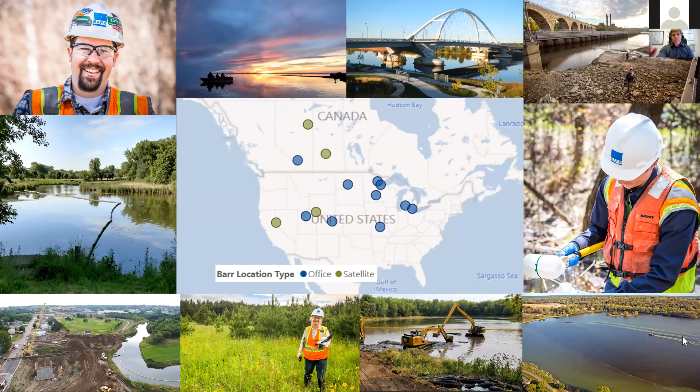Welcome to the Minnesota Association of Watershed Districts annual conference, and thanks for joining us at our session. Although we are really looking forward to gathering in person, hopefully next year, we are glad we can at least gather virtually this year. In the next few minutes, we'll give a brief overview of Barr, introduce our upcoming presentations in this session and also later at this conference, and highlight a few of our newer senior staff.

Of the more than 425 employees in our Minneapolis office, nearly 100 are engaged in water resource engineering and planning, stormwater, floodplain and wetland management, limnology, and landscape ecology. Our breadth and depth of experience offers watershed organizations peace of mind that we can provide an innovative solution to any water resource related challenge that we encounter.

Barr has served as the primary consultant of 18 different watershed organizations in Minnesota, with some of these relationships dating back to the 1960s. And we have worked with numerous other watershed organizations across the state, region, and country. And we are excited to share some of these experiences with you today with our upcoming talks during this session.

In one session, Senior Water Resource Engineer Greg Wilson will present pond treatment with spent lime to control phosphorus release from sediments. This presentation focuses on research done in cooperation with the Ramsey Washington Metro Watershed District, Vadnais Lakes Area Watershed Management Organization, and the City of White Bear Lake, and includes the evaluation of the costs for aerial chemical applications.

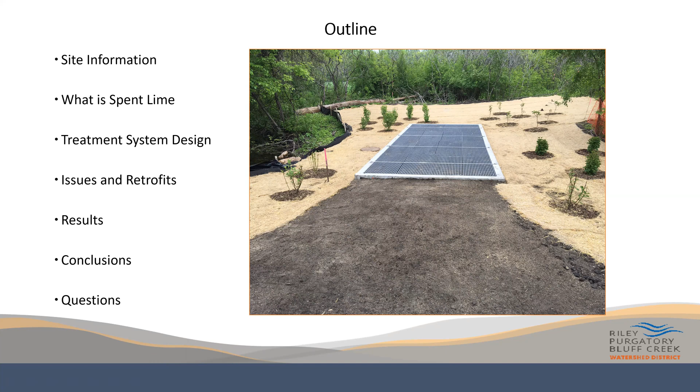But just a general outline for today: I'm going to discuss the site information, why we needed the spent lime treatment system there, what is spent lime and how it works a little bit, look at the treatment system design, how it functions, and then some of the issues and retrofits we put in place to correct those issues, and then work over a couple of years of results, sum it up with some conclusions, and then we'll have plenty of time for questions.

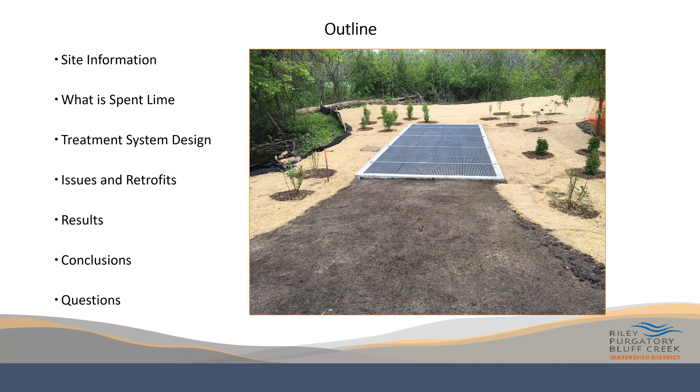So for those of you that are not familiar, the Riley Purgatory Bluff Creek Watershed District is about 50 square miles, and it's located in the Southwest Metro. Primarily Chanhassen, Eden Prairie, and Minnetonka cities make up the Watershed District. However, it does include 7 other cities. And the particular lake of concern that I'll be talking about today, and where the project is located, is Lake Susan, which is within the Riley chain of lakes.

Just a little background information on Lake Susan. It's a relatively small lake. It's only 88 acres. It has a max depth of 17 feet, and the direct runoff of the surrounding area is 66 acres with an upstream watershed size of about 1,200 acres. It's considered a eutrophic lake, and it is impaired for nutrients and mercury, which we have seen continuously. It's one of the more degraded lakes within the Riley Purgatory Bluff Creek Watershed District.

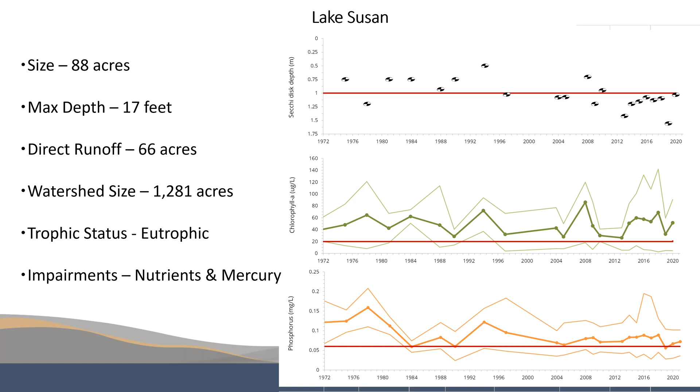So now I'm going to talk a little bit about the issue wetland that we were concerned with. So in 1996, Wenck completed a use attainability analysis, which really dives into looking at the areas of concern around the lake and identifying project areas. And this was updated by Barr in 2013.

And it identified that 67 pounds of phosphorus per year were entering Lake Susan from the wetland complex to the southwest. And this was the largest identified external source. And we looked at quite a few different options.

A wood chip bioreactor and iron sand filter were considered for this project location, but mainly because of the contact times with those two other treatment facilities, the overall footprint of the project was too large for the constraints at the project site. So we needed to fit a smaller treatment facility in there because of the wetland, and there's a trail system that runs in there.

And the spent lime treatment system, while very comparable in removal rates, allowed a smaller footprint, which is ultimately why the board decided to go with the spent lime treatment system. And again, we did partner with the City of Chanhassen. I'd just like to thank them again.

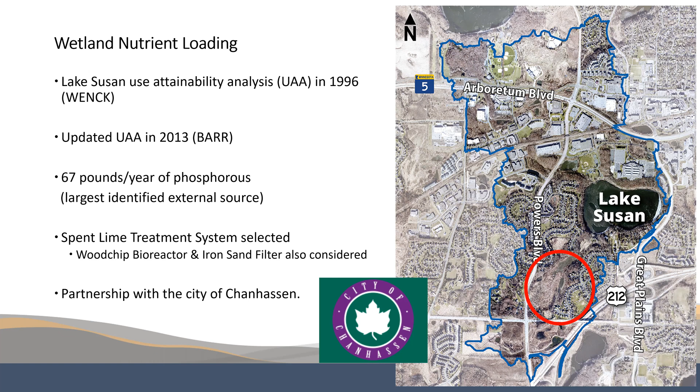So a little bit about what spent lime is. Basically, spent lime is calcium carbonate. It's a byproduct of drinking water treatment plants. Water is filtered through, and as water flows through spent lime, phosphorus binds to the calcium and forms calcium phosphate, and then it just leaves the phosphorus behind.

And although we don't really have a handle on exactly the lifespan of spent lime, its binding efficiency for phosphorus is really high. And some other projects have indicated it's got a very long lifespan. And then I just wanted to show the pictures of how we get the spent lime. It can be in larger clumps also, but the pictures to the right are compared to sand.

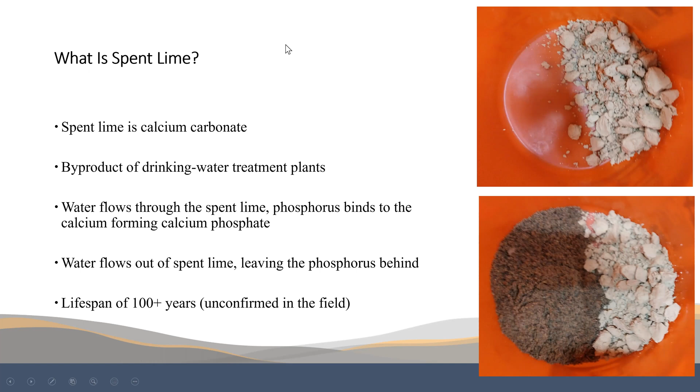So now I'm just going to walk through the spent lime treatment system. So starting off to the right, that's just a picture of the wetland. There was already a culvert going under the recreational trail that I talked a little bit about, and then that drains through another wetland creek area into the lake.

So we already had a manhole access point to take our inflow samples, and we essentially tapped into that and redirected about 56% of the annual flow via stop logs in the second picture there. We could manipulate how much water flow we wanted through the system. And it was estimated that about 65% of the total phosphorus would be removed from 56% of the flow through that system.

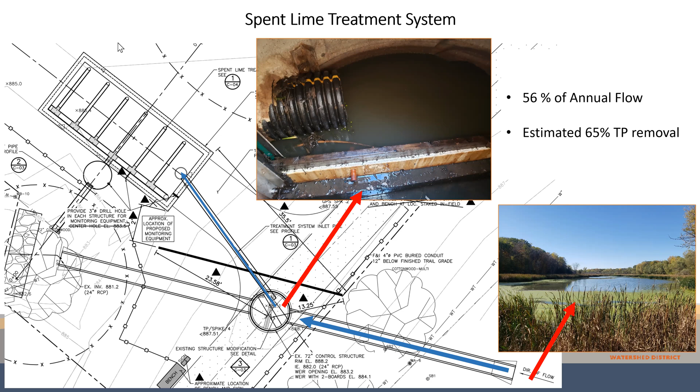So now taking a look inside. Once the water enters into the spent lime treatment system, which is essentially a concrete box, it's 25 feet by 10 feet. And then there's a layer of about 1.3 feet of spent lime material, and then pea gravel on the bottom. And within the pea gravel is a perforated drain tile to drain the water.

Water leaves and goes into the outlet manhole where we grab our outlet samples. And then there's a backflow preventer so the water doesn't back up into the spent lime system. And the contact time for spent lime is about 5 to 10 minutes. I mentioned that earlier. The other BMPs we looked at, those contact times were around 30 minutes. So it's a quick contact time with the removals.

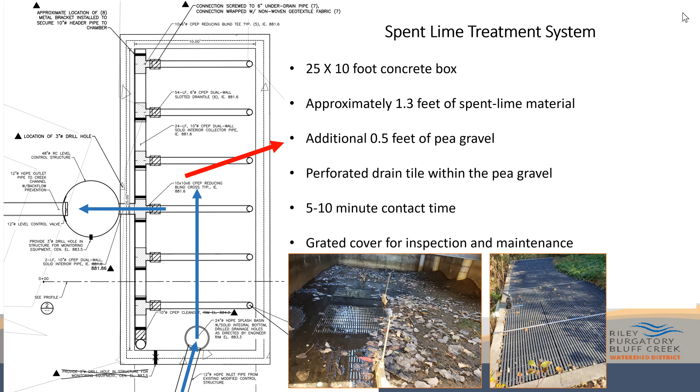And then over the top is a grated panel that can be removed, and we can climb around inside and fix whatever needs to be fixed. And that's just a picture inside. Directly below is a picture of what it looks like when it's all filled in. So as I mentioned, there's a backflow prevention device, and the discharge rate is about 0.2 cubic feet per second.

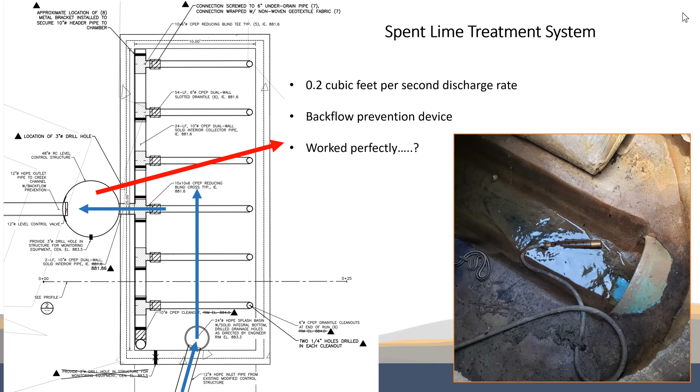And then, so we put the project in and everything worked absolutely perfectly. Well, as with newer BMP technologies, we did have some issues. And now I'm going to walk through the issues and how we attempted to correct them or corrected them, and just how it's worked overall. So the issues are highlighted in red, and what we did is below.

So one of the things we ran into was the system short circuiting. We did have different holes cut into the system that were maybe allowing the system to become leaky. And then also the corrugated underdrains. I showed up to the unit one day and we had a trench basically forming in the unit. And basically the corrugated pipe had become detached from the main stem drainage pipes.

And so we replaced those with hard PVC and shored up those connections. And then we fixed all the other leaks, potential leaks that we deemed necessary. And then one thing we did notice was we would show up there and there'd be long extended periods of inundation, more so than what the system was designed for. So we needed more control of the water.

So what we did is we did a couple things. We installed a solar powered lift station. Those are the two bottom pictures there. Well, actually it's all three of the pictures there. Basically this allowed us to reduce the system operation so we could really pinpoint and make sure our system was efficiently performing. So what we ended up doing is running it Monday, Wednesday, Friday from 8 to 5 o'clock.

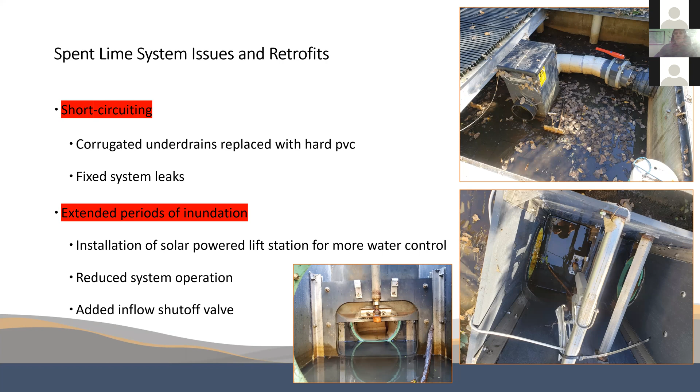So one of the bigger issues that we did run into was the compaction of the spent lime material didn't allow for filtration and ultimately nutrient removal. So after long extended periods of inundation, the spent lime material packs together real tightly and almost eliminates flow through the system or severely reduces it.

So what we decided to do was look at something we could mix with the material to improve filtration capacity. And so we decided to mix sand with it. So we tested different types of sand: just regular sand that you can get anywhere, wash sand, plaster sand, and pool sand. And then we did different mixes of that. So 50-50, so 50% sand, 50% spent lime, 70% sand, 30%, and so on.

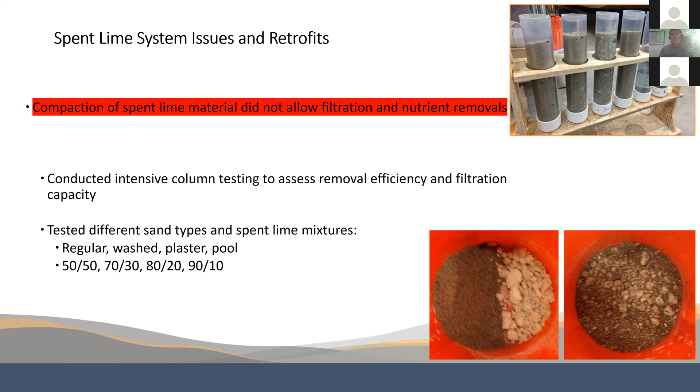Just to see. So we set up this column experiment in the lab with these different mixtures, and it allowed us to capture what was happening. So we were looking at two main things, obviously removals, but also the ability of the water to move through the material. So what we did was we flushed water through the different mixtures periodically after remaining stagnant for up to 114 days. So that graph on the top right, the x-axis there is the days, and then the TP % reduction.

And you can kind of see, we ultimately decided to go with the 70-30 mix because it performed just as well as the other mixtures. And then on the bottom graph right below that, again, days are on the bottom, and then that's how much time it took for the water to flush through the system.

So basically we set up the columns, we put water in it, we flushed each of the columns a bunch of times, put water in it, let it sit for that number of days. We'd let that water drain out, and then we'd take fresh water from a wetland and compare the pre and post, how fast it went through, and then the phosphorus that was pre and post.

And then on top of that, we wanted to really see if we continuously ran water through, if any of the material would migrate through the sand, the spent lime material, and compact on the bottom. So we wanted to know that as well. So we set up two columns, 70-30 and 80-20 sand spent lime mixture. We allowed it to continuously run. So we put a pump in there and just let it run for 54 days just to make sure our filtration capacity wasn't reduced.

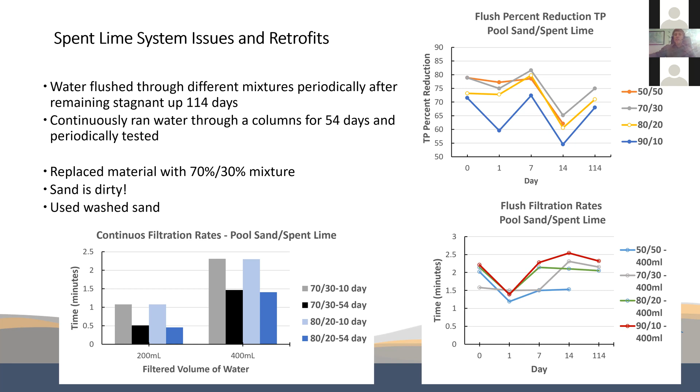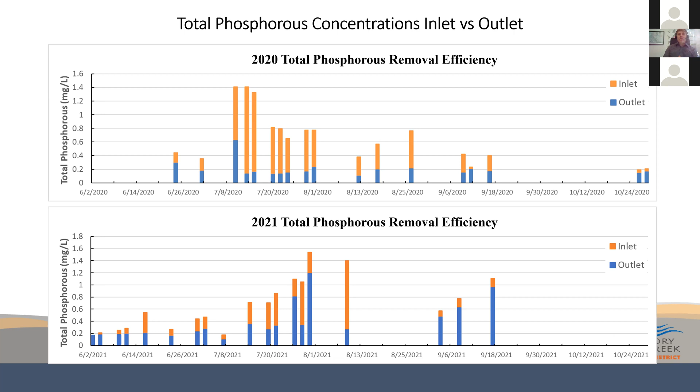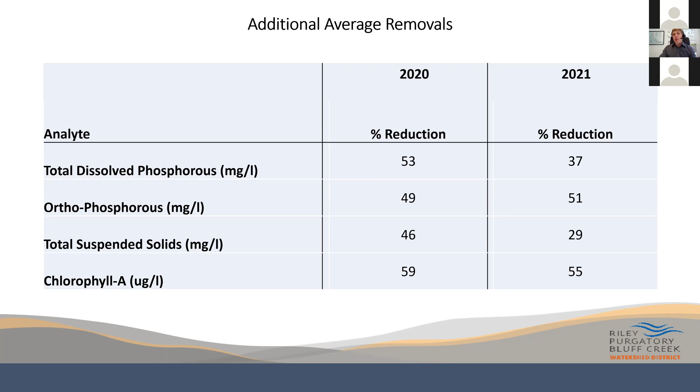We didn't just monitor total phosphorus, we monitored chlorophyll, total suspended solids, and then we broke phosphorus up into total dissolved phosphorus and orthophosphorus also, so different forms of phosphorus. Again, across the board in 2020, we had 50% reductions across all those other parameters we measured. And in 2021, you can see orthophosphorus and chlorophyll remained relatively the same reduction efficiencies, but total dissolved phosphorus and total suspended solids were reduced, but it is performing.

So overall, in general, conclusions: check your source materials and expect initial flushing. Again, sand is dirty, so make sure you're getting the best quality sand that you want for your project. And even if you're getting really good sand, it's likely that you're going to have some initial flushing anyway. So just be aware of that.

And then it is critical that the spent lime material is allowed to dry out. Again, we saw that long periods of inundation cause the physical properties of the media to prevent filtration, so we need to allow it to dry out. So having that water control is good. Occasional mixing or fluffing of the spent lime is needed. We mixed it once in each year, and we may increase the mixing. This is essentially preventing the material from compacting and breaking up the preferential flow paths that are forming within the material.

We also have looked at different ways of mixing. Currently, we're just mixing by hand, but we're also looking into that. And then, like what I talked about earlier, the incorporation of gates and valves for on-the-fly adjustments to improve overall system performance really helped us in this project, was necessary, and should be considered when putting in BMPs. And then overall, the spent lime treatment system works.